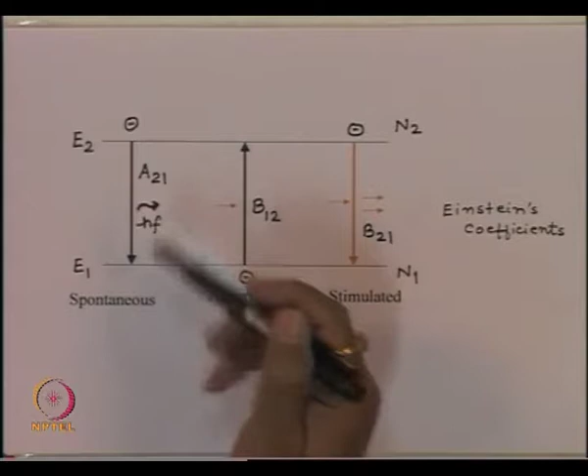In the last lecture, we saw that inside a material there are three processes which take place, namely the spontaneous process, the stimulated process and the absorption process. And then we saw that the spontaneous process takes place on its own. So, if the electron is there in the higher energy state, then naturally it has a tendency to relax to the lower energy state, and in that process the photon is released, which we call as the spontaneous photon.

Then the two processes which take place in the presence of a photon, that is the absorption process, that is when the photon is incident on the material, the photon is lost, an electron makes an upward transition. In the other case, this photon may stimulate a downward transition of the electron, and in that process we have two photons which are emitted, and these two photons have same properties as the original photons, or in other words these two are the coherent photons.

And then we saw that this process is more like a multiplicative process, because one photon can create two photons and then two photons can create further photons and so on. So, once this process starts taking place, the spontaneous emission does not have much scope to show up, and that is the reason in the following discussion we essentially concentrated only on two processes. One is the absorption process and other one is the stimulated process. And then we quantitatively wrote the equation of the growth of the photon flux as a function of time.

We also saw that inside a material the probability of an upward transition and downward transition in the presence of a photon is equal. That means, when the photon is incident, we cannot predict whether this photon will get lost, an electron will make an upward transition, or will the photon stimulate this process and ask this process to emit one more photon.

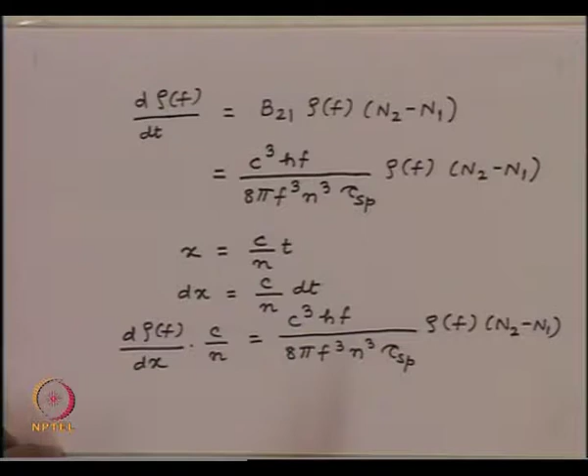And then we saw that when the photon is there inside the material, it is not stationary, it moves with velocity of light. So, therefore, we have a distance travelled by the photon, which is velocity of light inside the material, which has a refractive index n, multiplied by t. So, we could convert this equation, which is with respect to time, in terms of distance x. So, the equation was converted into this equation, which was further simplified to get an equation which was this.

So, we had a differential equation for the photon flux as a function of distance, which could be written as some constant g multiplied by the photon flux. So, this says that the photon flux grows exponentially or decays exponentially depending upon sign of this g when it travels inside the material.

And then we saw three conditions, that is, if N2 is less than N1, then this g is negative, then the photon flux essentially exponentially dies down as it travels inside the material, and this quantity then one can call as the attenuation constant. So, g will be negative. So, g is equal to minus alpha.

Whereas, if you are having N2 is equal to N1, then for the photon flux which is incident on the material, essentially the same number of photons come out. Not that internally nothing has happened to these photons; again some photons got absorbed, some photons got emitted and so on, but the net photon flux which is coming out is the same as the net photon flux which was impinging on the material. This condition we call the transparency condition. So, in that process the G is 0. The photon flux neither grows nor decays when it travels inside the material.

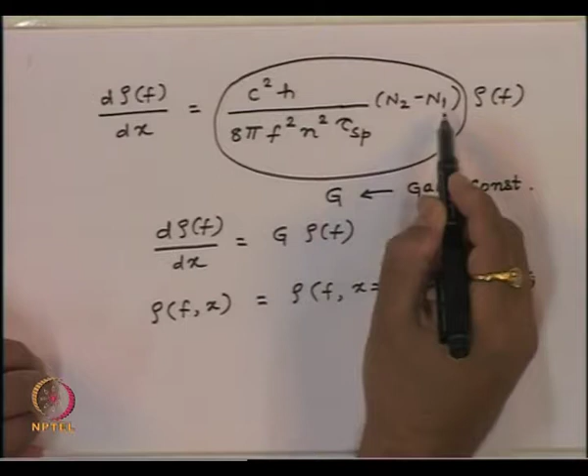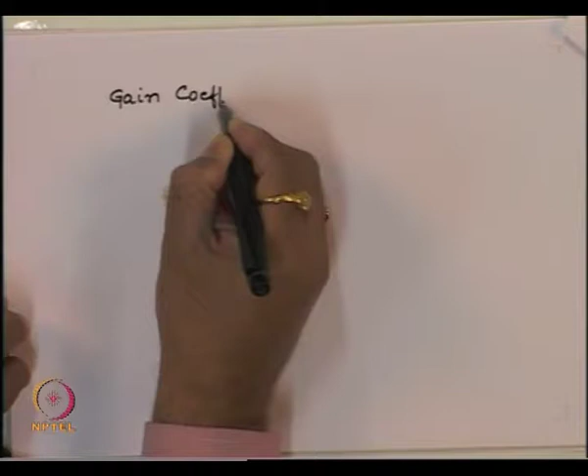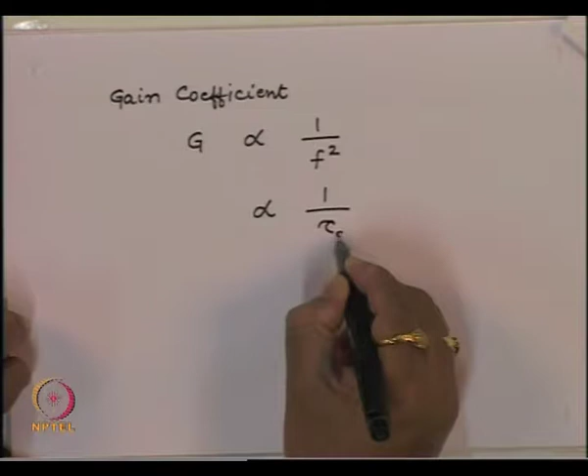So, if you want to write explicitly this quantity, the gain coefficient G is proportional to 1 upon f square. This quantity is also proportional to 1 upon tau sp, it is proportional to the population inversion, which is N2 minus N1, and it is proportional to 1 over the refractive index square. Since the refractive index square is nothing but the dielectric constant of the medium, the gain is inversely proportional to the dielectric constant of the medium.

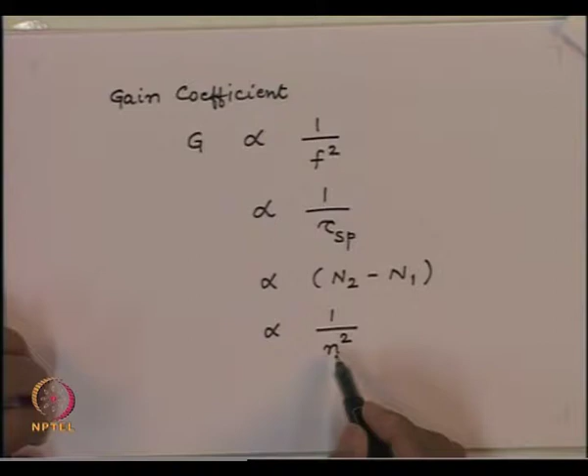But if I look at these parameters here, what we find is for given parameters like population inversion and spontaneous lifetime and so on, the gain is inversely proportional to the square of the frequency. That means lower the frequency, higher will be the gain. In other words, a system can be lased very easily at low frequencies compared to high frequencies. That is the reason creating a laser at low frequencies or longer wavelengths is relatively easier than making lasers operate at high frequencies or shorter wavelengths.

Later on we will see that when you have materials with various energy levels, and if the population inversion is created, then longer wavelengths will have a tendency to lase faster, and once they start lasing, the population inversion which is created gets diverted to the amplification of the longer wavelength signals.

The second thing to be noted here is that the gain is also inversely proportional to the spontaneous lifetime. That means shorter the spontaneous lifetime, higher will be the gain. What that physically means is that if tau sp is small, the electrons are naturally willing to jump down. Even if the stimulated process was not there, it would have jumped down because of the spontaneous process, because tau sp is very small. So, the electron is eager to make a downward transition, which makes the stimulated process easier. So, you get a higher gain.

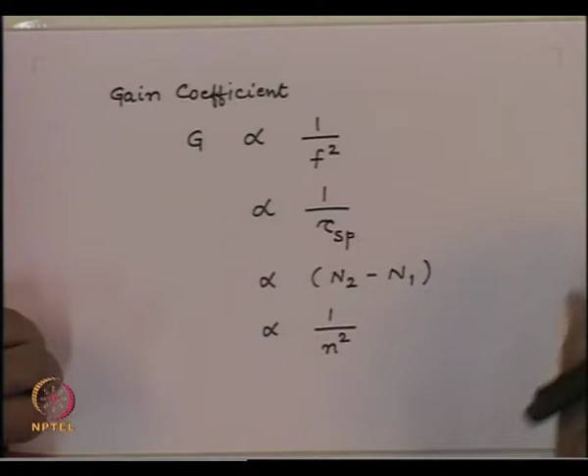Then of course, we have the gain proportional to the population inversion, and it depends upon the dielectric constant also. So, at this stage one can say that if there is a population inversion, then depending upon the frequency and the spontaneous lifetime, the photon flux growth will change inside the material and the radiation will grow exponentially as it travels inside the material.

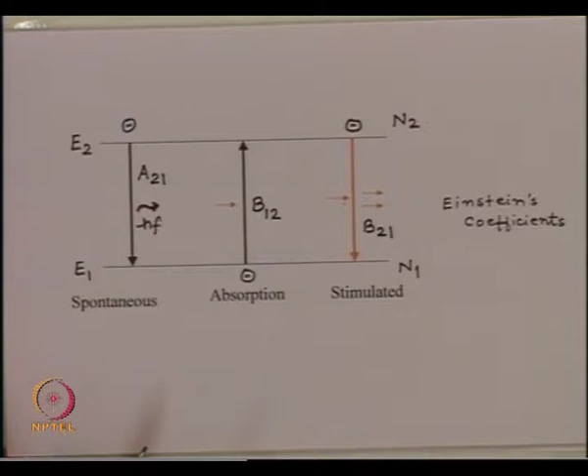So, up till now essentially we were seeing this whole process, the stimulated process, as the amplification process, and in fact this process is an amplification process. If you recall, when we started discussing this process, we said this photon which comes here triggers this transition down. This whole process is stimulated by this photon which is incident here. If this photon is not there, then of course this process will not get stimulated, and there is no question of these two photons getting generated. There is no question of stimulated emission.

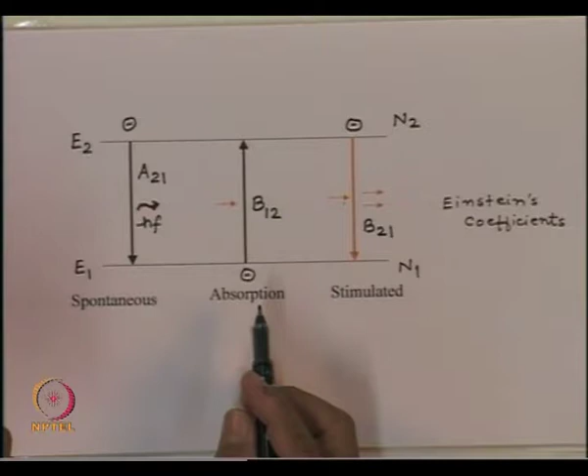So, when we are trying to use this system as an amplifier, that is what principally laser is. It is light amplification by stimulated emission of radiation. Then this photon is supplied externally; that is the photon which is to be amplified. That is the optical signal which is to be amplified.

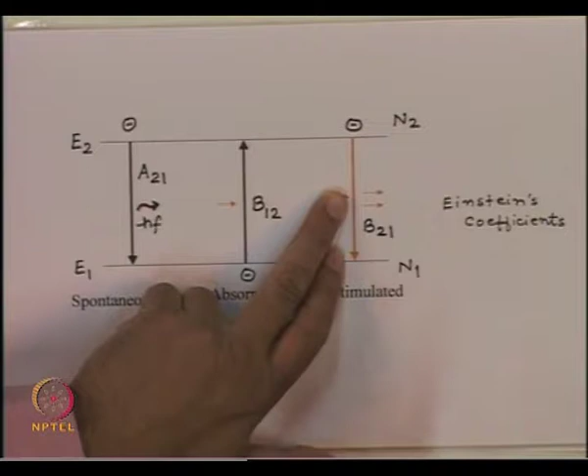But when we are discussing now this source laser, we want this laser to generate light. For optical communication, of course, we may use laser for amplification, but at this point of time we are looking for an optical source. So, what that means is that now this photon which is going to trigger this process is not going to come from outside. If the photon does not come from outside, then of course this process cannot take place.

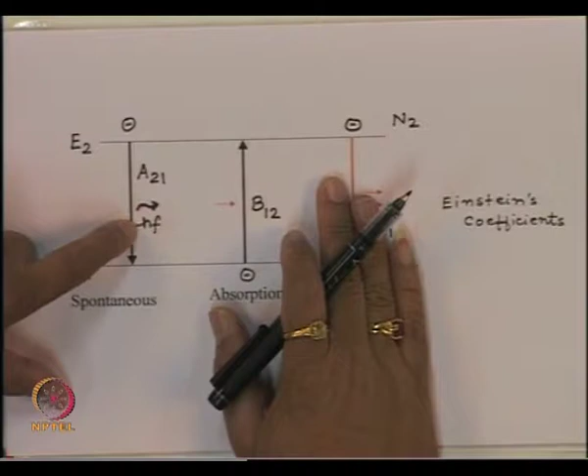But note that if the photon was not present here, and if you create population inversion, that means more electrons in the upper level, then naturally this will make a transition and this photon will be emitted. Once this photon is emitted, the photon is available, and it can trigger a stimulated process. So, even if one transition takes place here, the photon is going to be emitted, and this photon is capable of starting the stimulated process.

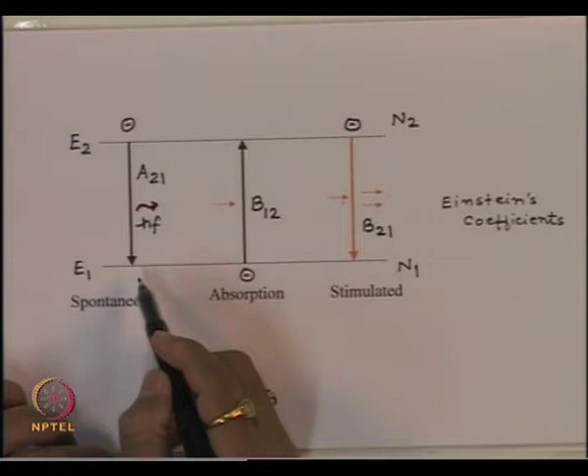But what that means is that the seed for the stimulated emission is internally generated due to spontaneous emission. And since this process is only an amplification process, the characteristics of this photon created by spontaneous emission are going to be reflected into these photons also, because this process is essentially creating more photons having the same characteristics as the original photon.

Now, this photon, because of this transition here, is incoherent radiation, because photons from spontaneous emission do not have a relation with respect to each other. So, they do not travel in the same direction. There is no spatial coherency between these photons. So, if these photons were not spatially coherent, even the photons emitted here will not be spatially coherent. So, if the seed has to come from inside, then the emission you get, even because of the stimulated process, will not have spatial coherency.

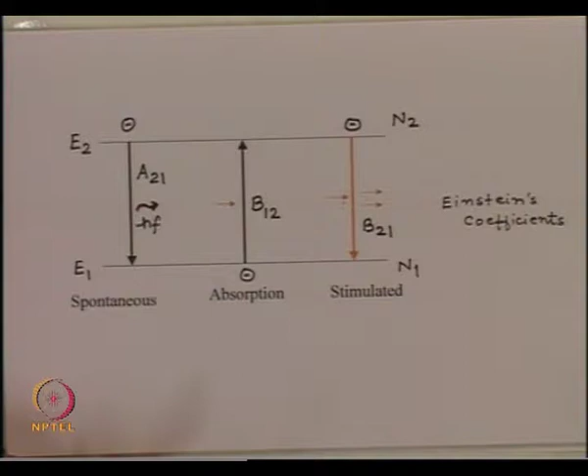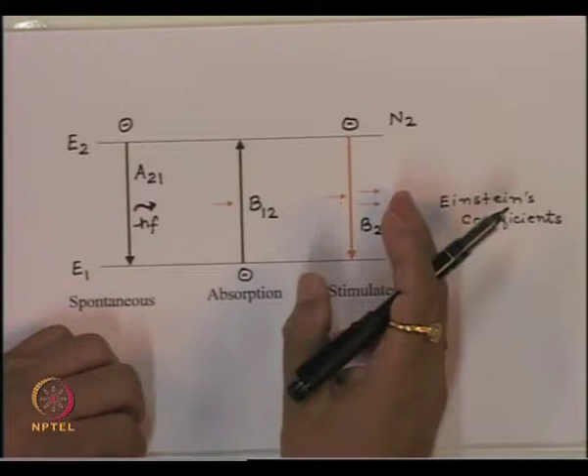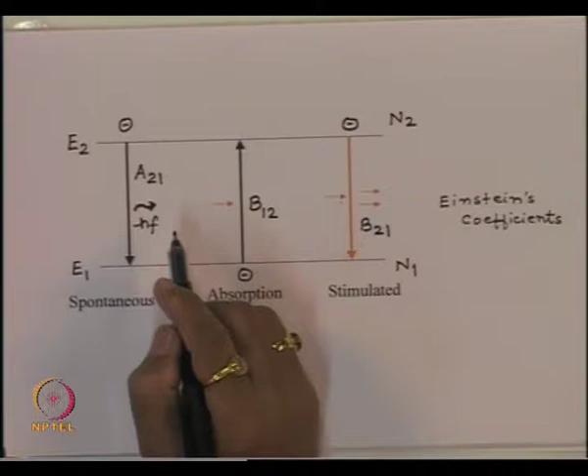Temporal coherency will be there because we are talking about very sharp discrete energy levels. Later on you will see that in a semiconducting material these bands are not sharp, and then this photon will also have a spectral width, and we will not have even temporal coherency in the stimulated emission. So, the first thing we note is that since the seed is coming from inside, though amplification is there and the number of photons is large, they will not have complete coherency.

But we had the same problem in other amplifiers also. With electrical amplifiers, we can always convert an amplifier into an energy source called an oscillator, and there also the signal is generated internally because of noise. Then if you want to create coherency in the electrical signal, which means creating a sinusoidal signal from an oscillator, what do we do? We essentially take that output signal and have a frequency selective feedback.

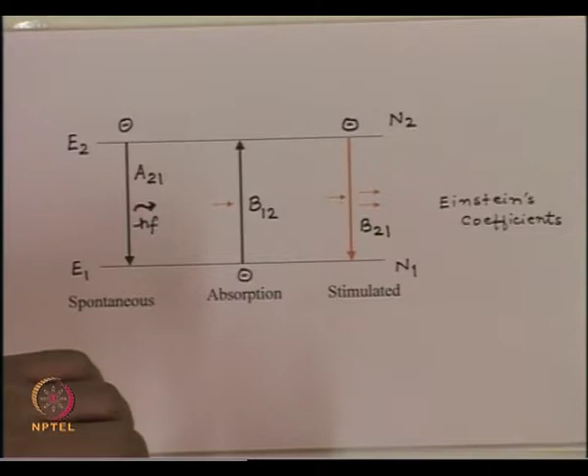So, the photons which are generated, which are random, spontaneous in this case, will give you amplification. And now, if we make sure that not all the photons get amplified, but photons are very selectively fed back into the system, so the gain is selective for certain frequencies, then essentially the coherency in the system is increased. So, the first thing we have to do is create some kind of frequency selective mechanism, so that the coherency of this radiation can be increased in the system.

Now, coming to the semiconducting material lasers, if I look at this expression here, which is the gain coefficient, leave all these parameters here: the spontaneous lifetime, which will become the radiative recombination lifetime here. This is the frequency, which will depend upon the band gap of the material. But the quantity here, which is N2 minus N1, is nothing but the injected carriers in the PN junction under the forward bias condition.

So, if you inject the electrons and holes inside the junction, then this quantity N2 minus N1 equivalently means that I have electrons and holes available for recombination, and these can recombine. Once the photons are generated because of this spontaneous recombination, these photons can trigger the stimulated process, and much faster recombination will take place, which will give the stimulated emission.

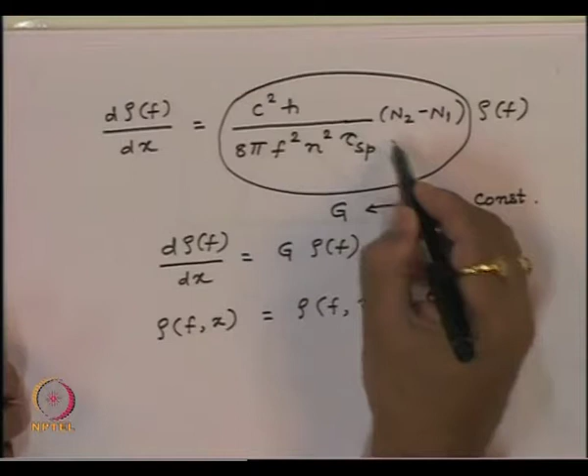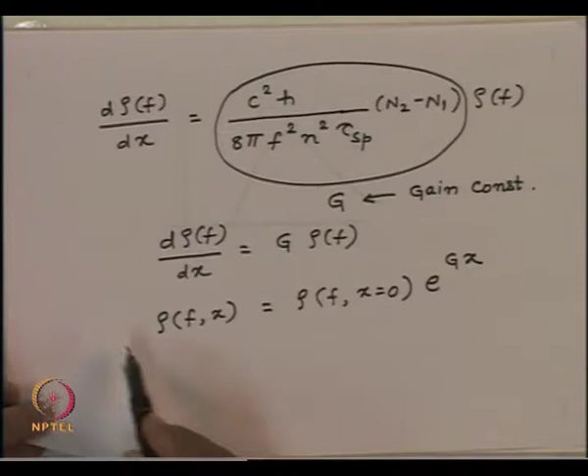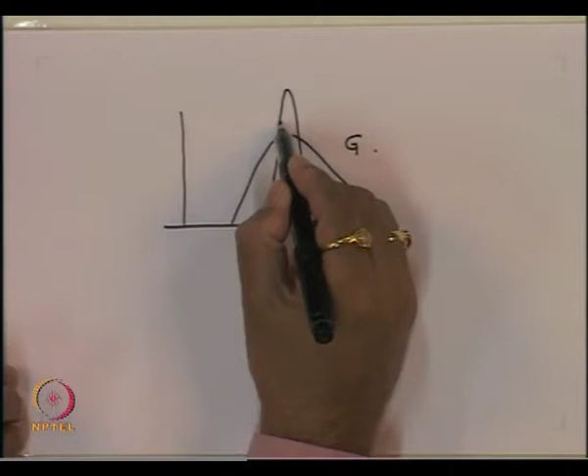But since this quantity g is now riding on the exponent, if I write down the spectrum of the photon flux as a function of frequency, that will be much sharper compared to this, because this is not the spectral distribution of the photon flux. Photon flux has a spectral distribution which is e to the power g. So, we get a photon flux distribution which is much narrower, or in other words, its spectral width is much smaller.

The first thing we had noted for the LED is that it has a very large spectral width, which is not very good for optical communication because it gives large dispersion. We now see that if we take the same semiconducting material and trigger the stimulated process inside it, the spectral width of the photon flux will reduce considerably, because this function is now going to ride on an exponent.

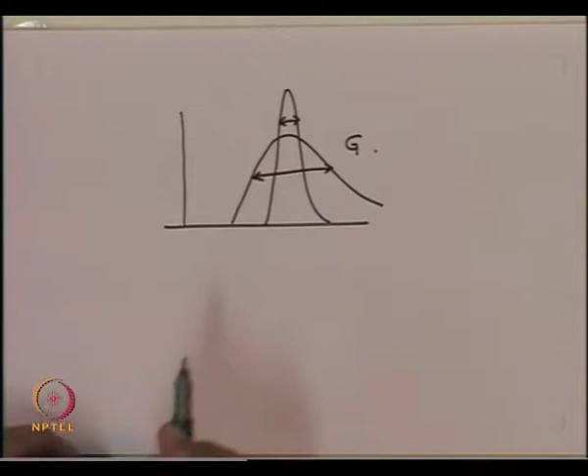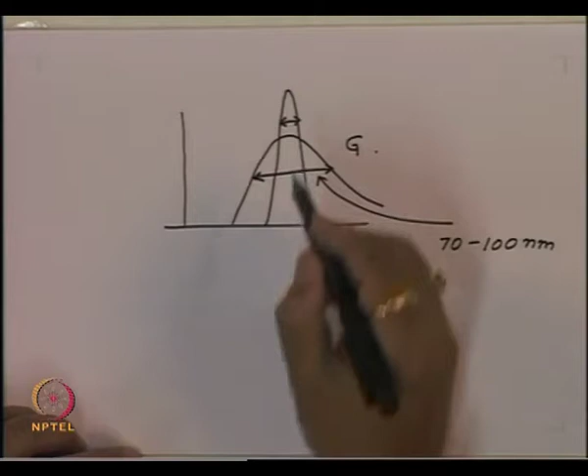As we have seen, the spectral width for the LED was typically of the order of about 70 to 100 nanometers, whereas for a laser the spectral width will typically be of the order of about 1 to 2 nanometers.

So, the idea is very simple: we take the same p-n junction and inject the carriers inside it, and when recombination takes place, the photons generated by spontaneous recombination will trigger the stimulated process. If the stimulated process dominates over the absorption process, we will have stimulated emission coming out. But the spectral width of this stimulated emission will be much narrower compared to that of the spontaneous emission.

So, one reason for which we wanted to go for lasers was the reduction in the spectral width, and that has been achieved here. With the same p-n junction LED, if we do some manufacturing tricks and inject enough current inside the p-n junction, we can get an emission with a spectral width much smaller than what it would otherwise have given. So, one purpose has been achieved in this process.

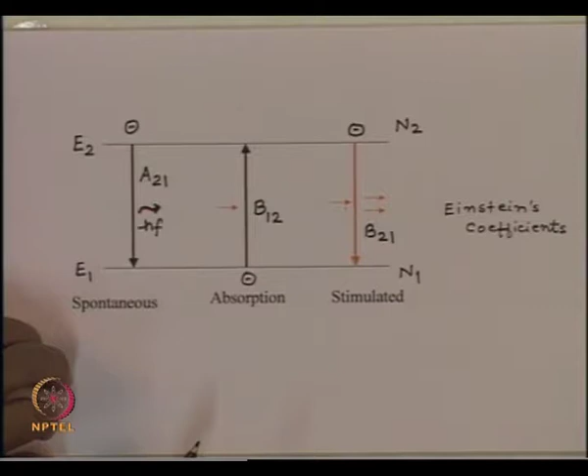As I mentioned, if the whole process is started by spontaneous emission, and the spontaneous emission is isotropic in nature, then the radiation coming out, even for stimulated emission, will intrinsically be isotropic in nature. There is no spatial coherency in that. So, how do we introduce spatial coherency? As I said, spatial coherency can be introduced by giving certain feedback.

So, putting the photons back inside the system only for certain directions and making the photons leave which are not traveling in that direction. If you could do that, then essentially we have created the spatial coherency into the system. So, this is what precisely is done here.

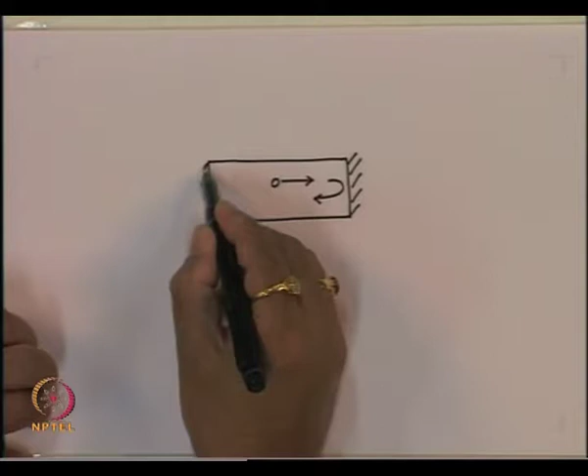Now, when the photon reaches this wall, let us say we put a mirror on the face of this medium. So, the photon will reach up to this point and will get reflected from this. The photon will travel all the way back up to this face, and when it comes here, let us say if you had a mirror here also, the photon will come, will get reflected again and travel back inside this.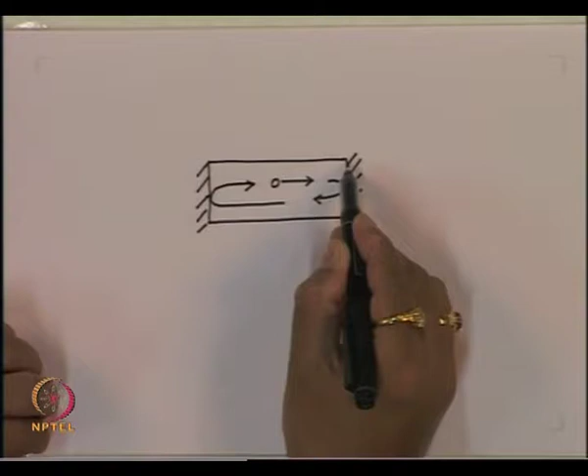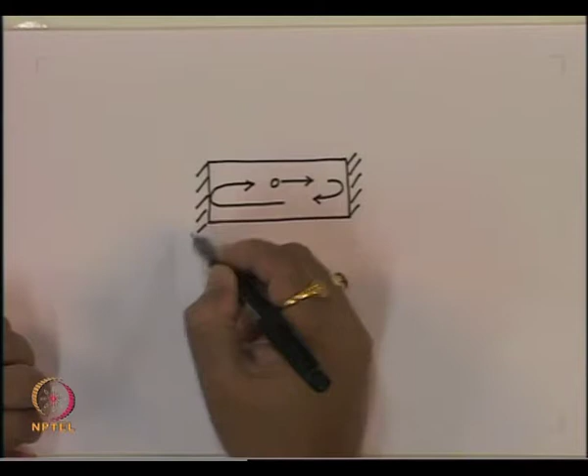So, the photon which has traveled perpendicular to these mirrors, and if these two mirrors are parallel, then the photons which are moving in this direction will come back to this location here. Whereas, if the photon is not moving perpendicular to these two planes, it will move and it will simply get lost. So, those photons which are moving in this direction, they will get lost, they will not be confined inside the medium. Whereas, the photon which is moving perpendicular to these mirrors, it will be confined inside the medium.

And as we saw, if the photon is confined to the medium, it travels more distance inside the medium, and therefore, it grows in number. So, these photons which are moving in this direction, they will travel a short distance inside the medium. So, they will get amplified during this process, but after that they will leave the medium and they will be lost. Whereas, the photon which is moving in this direction will travel this distance, which is much longer compared to these photons, and therefore, will grow in numbers substantially. So, what we have done in this process, we have essentially diverted the amplification process to only the photons which are moving perpendicular to these planes.

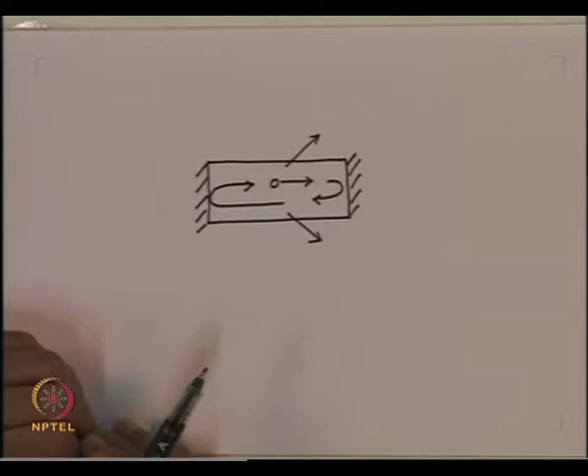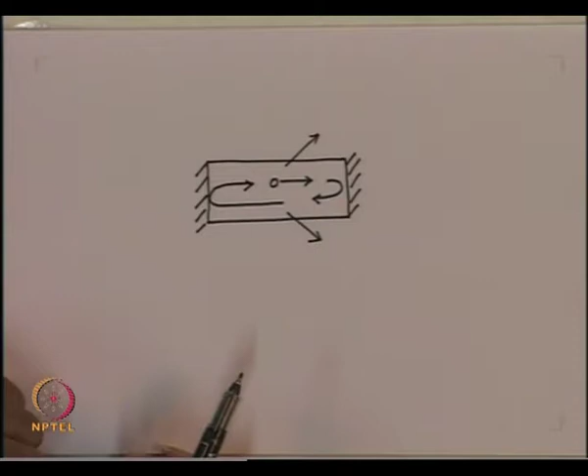So, let us say in the general case these mirrors are not completely opaque, they are not reflecting the complete number of photons, because if that happens, the photons are completely confined inside this box and no stimulated emission will come out of the system, which is not of any use. So, we want that a small fraction of photons should leak out, and those photons which are leaking out will have the same characteristics as the photons which are confined inside this region.

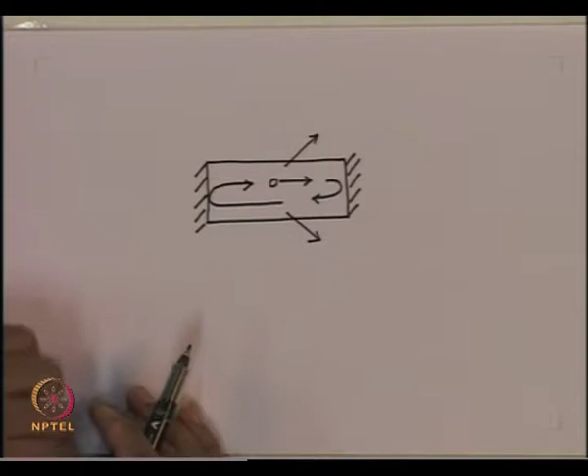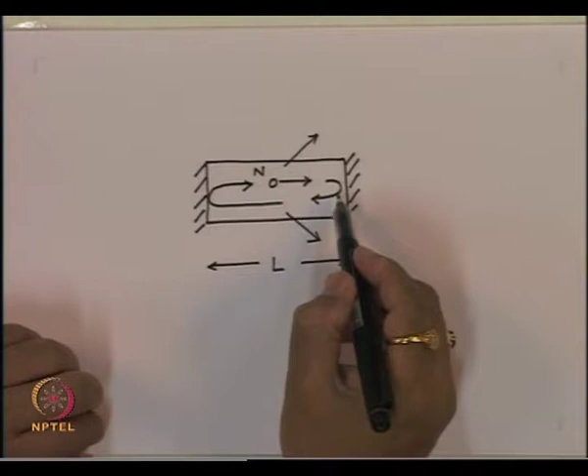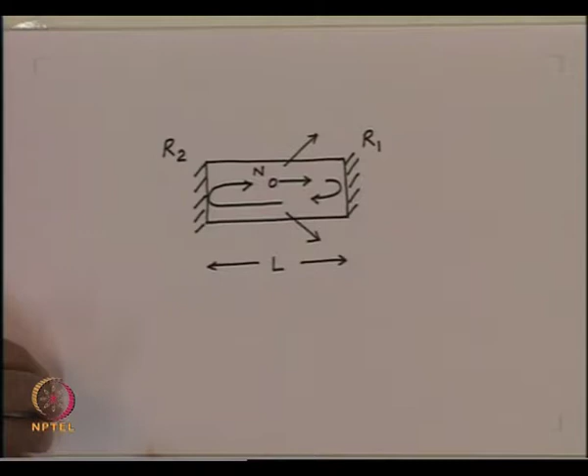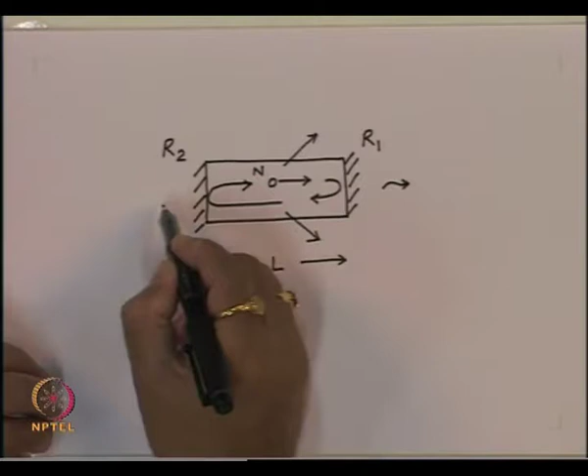So, let us say if we start some n number of photons from this location, they move in this direction, let us say they travel a distance L, and then they again come back to the same location. So, in that process they have traveled a distance which is equal to 2L. Also, if the reflectivity of this mirror is given by R1 and the reflectivity of this mirror is given by R2, then the n photons which started from this location would grow exponentially, which is n times e to the power g into total length traveled, which is equal to 2L. But part of the photons are going to leak also from here and from here. So, the photons which are going to be confined here will be multiplied by this reflection coefficient, which is R1, similarly reflection coefficient here R2.

Also, it is possible when the photons are moving inside this, there may be some other mechanism by which the photon may get lost, because of recombination or because of absorption. So, we have a stimulated process which gives you gain, but there may be some other processes which might create a loss for the photon. So, we have a gain inside this system, let us say this is G, and we are having an attenuation constant for this material, which is, let us say, given by alpha. So, when the photons move inside this, we will have the net gain coefficient, which will be G minus alpha.

So, now one can say that if we start with n photons from here, after one round trip, the photons which reach here will be n e to the power G minus alpha into the distance travelled, which is 2L, multiplied by the reflection coefficients, which are R1 and R2.

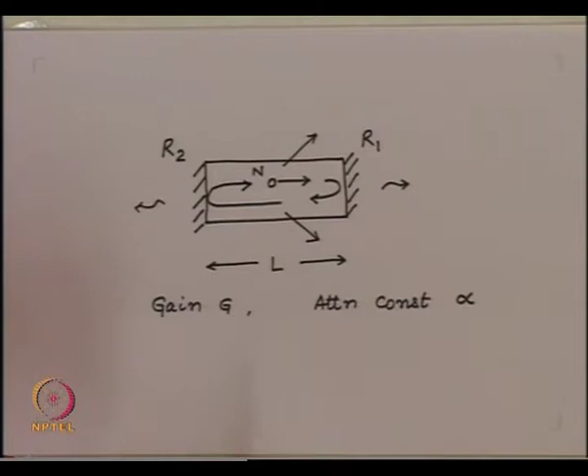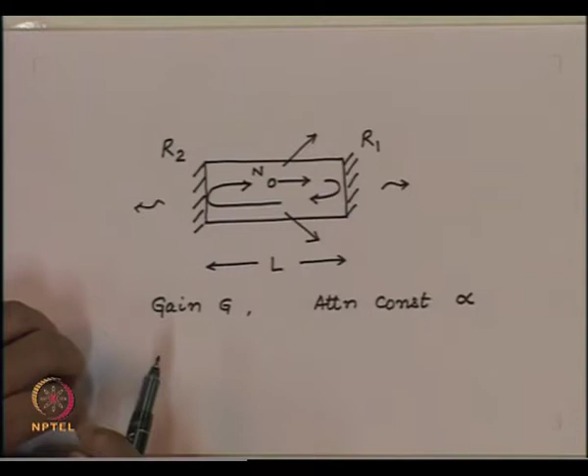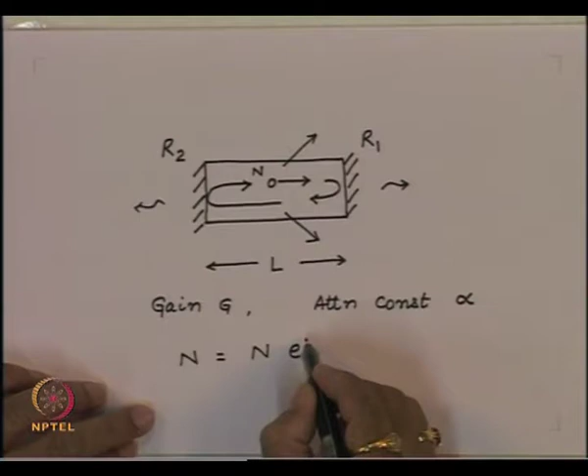Now, if we want the whole system to be in a steady state condition, that means even after leaking these photons out, the total number of photons which are confined inside this region is unchanged as a function of time, then the number of photons which started from here should remain the same after one round trip. Or in other words, n should be equal to n e to the power G minus alpha into 2L multiplied by the reflection coefficients, which is R1 R2.

N will cancel. So, essentially we get R1 R2 e to the power (G minus alpha) into 2L is equal to 1. This is then the condition for the sustained oscillations inside this region, which is the same as the Barkhausen condition for an electronic oscillator. So, if this condition is satisfied, then the photon flux neither grows nor dies as a function of time inside this region.

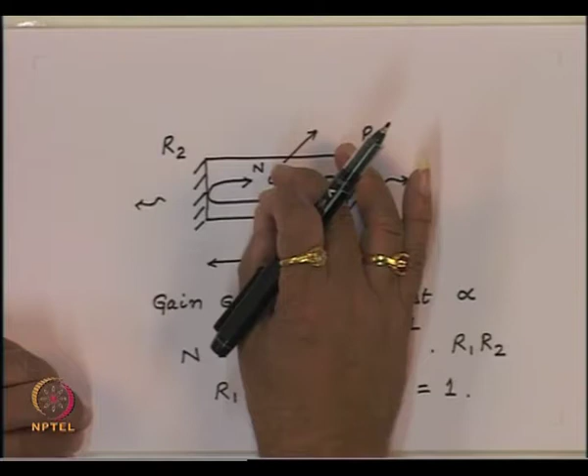So, considering all losses inside this medium and also the partial reflections which are going to take place from the mirrors, if this condition is satisfied, then you will have the net flux of the photons constant inside the region, and also the net photons which are leaking out will be constant. So, we will have a constant radiation coming out of this system, which will have the same properties as the photons which are inside this, and inside this region the photons are coherent. So, this radiation which is coming from here also will be coherent.

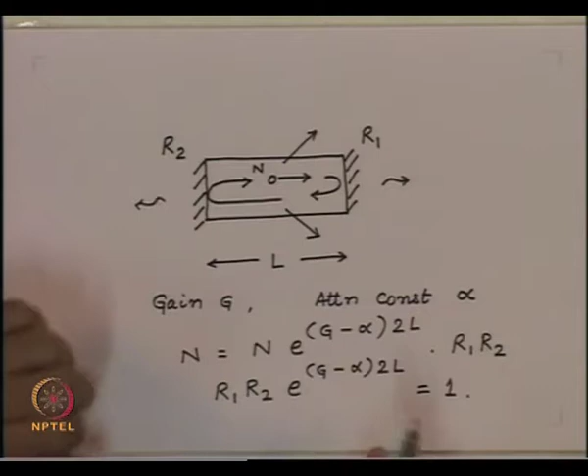So, intrinsically we had temporal coherency because the spectral width was very small, it corresponded to the energy levels, but originally it did not have spatial coherency. And now by putting these mirrors here, we have introduced the spatial coherency, because now only the photons which are moving in these directions get amplified, but the photons which go in this direction do not get significantly amplified. So, this emission which is coming out from here will be spatially coherent also.

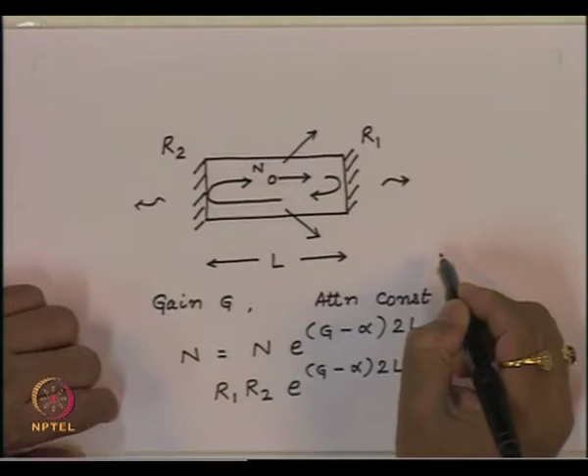Or in other words, the radiation which comes from here will be highly beamed radiation. So, it will be a narrow beam, because this radiation corresponds to essentially the photons which are bouncing back and forth between these two mirrors. So, this is the very important condition for the sustained oscillation inside this region.

Now, up till now we were treating the photon more like a particle, and we talked only about the number of photons and so on, but a photon essentially is an electromagnetic wave. So, when we are saying the photon is moving from here and then coming back like this, essentially the electromagnetic wave is bouncing back and forth between these mirrors. So, if the electromagnetic wave travels a distance which is equal to 2L, it undergoes a phase change.

So, after one round trip, even if the total number of photons is conserved, that means this condition is satisfied, if the phase of the photon after one round trip is not a multiple of 2 pi, then the photon which is reaching here after one round trip will not be in phase with the photon which is born there at that instant of time. So, these two fields will cancel each other. In other words, it will have a destructive interference.

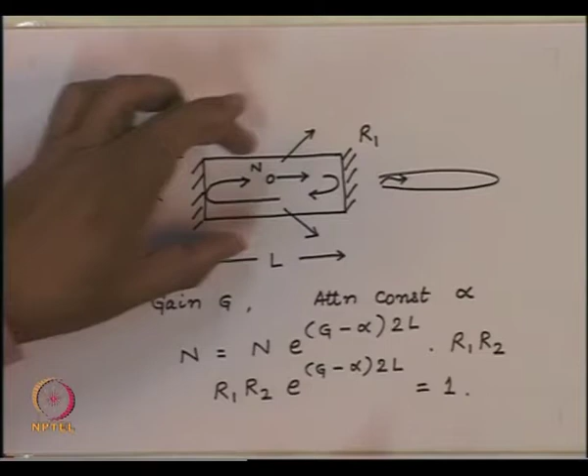So, for a sustained oscillation, only this condition is not adequate. This condition should be there, but in addition to that, we must also satisfy the phase condition for this wave which is traveling inside this. Now, note here, this is a bound structure. You have a bound medium here and the wave is traveling inside this. So, essentially we are talking about propagation of an electromagnetic wave inside a bound dielectric medium, which is nothing but a waveguide.

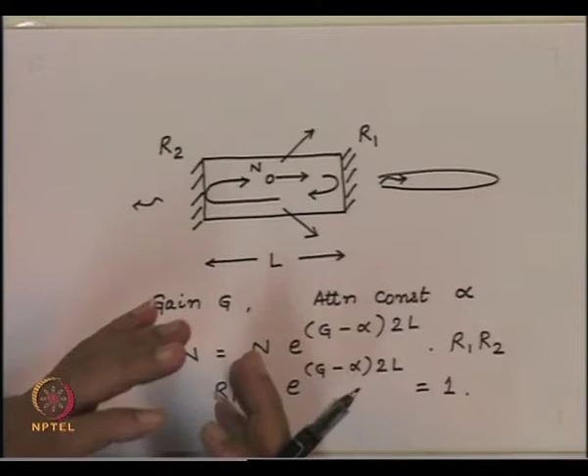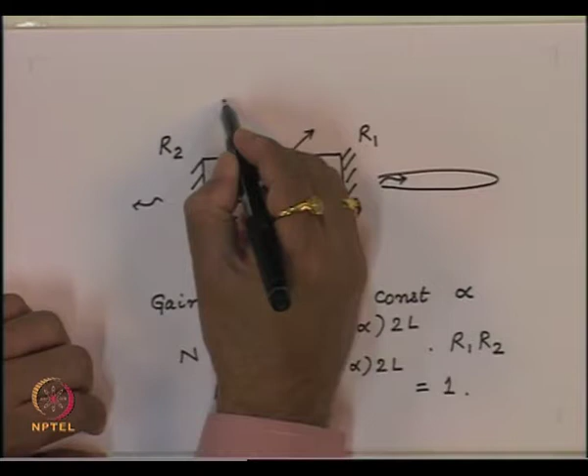So, we have here propagation of light inside this medium, and this structure is like a waveguiding structure. And since we are putting reflecting boundaries on the two ends, the electromagnetic wave is reflected and bounces back and forth, or in other words, this structure has become a resonant cavity for the electromagnetic wave. And therefore, this is what is called the Fabry-Perot cavity. So, this structure where photons are confined by putting mirrors on two sides is what is called the Fabry-Perot cavity.

So, now we have a waveguiding structure like this, and the electromagnetic wave is going to move inside this, and then you are going to put the boundary conditions here in the form of mirrors which will reflect the wave. So, you will have a resonance inside the structure.

Now, we know from our basic knowledge of waveguides that when an electromagnetic wave travels inside this bound medium, it may not travel like a uniform plane wave. It travels in the form of a mode. So, it has certain distributions in the transverse direction, which is this direction, and will have a propagation constant in this direction. And as we know, the propagation constant is characterized by the wavelength of that mode inside this waveguide.

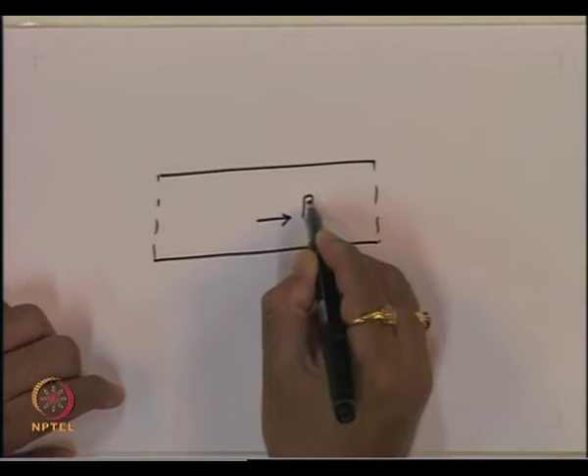So, you can say that you have now the phase constant in this direction, which is given by beta, and beta, which is the phase constant, is equal to 2 pi divided by lambda, which is the wavelength, multiplied by n effective of this medium.

Now, note here we are using the term n effective and not the refractive index of this medium, because when the electromagnetic wave travels inside this, it is going to travel in the form of modes, and the velocity will not be same as a uniform plane wave in that medium. So, if we calculate the ratio of the velocity of light in vacuum to the velocity of light of a mode inside this medium, that number will not be same as the refractive index of the medium, but that number is the one which we call the effective refractive index. So, for a particular mode of this waveguide, we have a refractive index which is given by this.

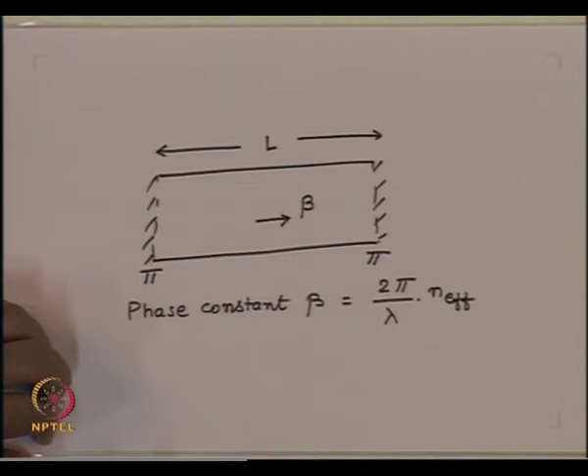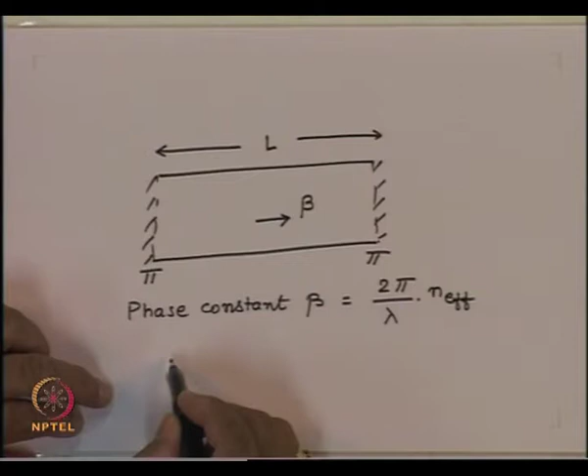So, now what we are saying is, if the length of this thing is L, and let us say you are having completely reflecting mirrors here, which introduce a phase shift of pi. So, we got a phase shift of pi here, a phase shift of pi here, and the wave has travelled a distance which is 2L into beta. So, the net phase change which we get in one round trip will be equal to pi plus pi, which is 2 pi, plus 2 beta into L.

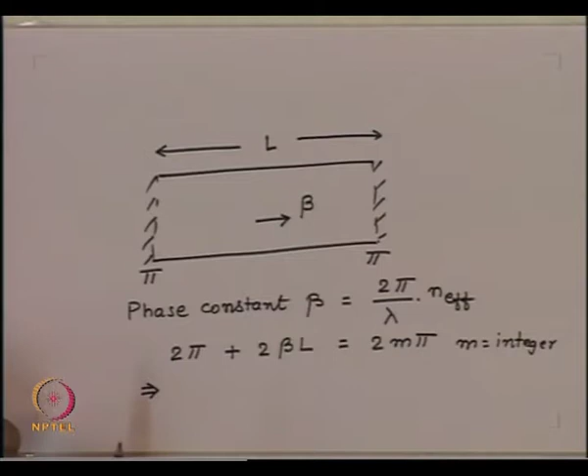And we are saying for constructive interference, this phase change must be equal to multiples of 2 pi. So, you want 2 m pi, where m is an integer. We can absorb this 2 pi on this side. So, what that means essentially is that if this condition, 2 beta L equal to integer multiples of 2 pi, holds, then we will have constructive interference, and then we can have the oscillator working and getting a coherent emission out here.

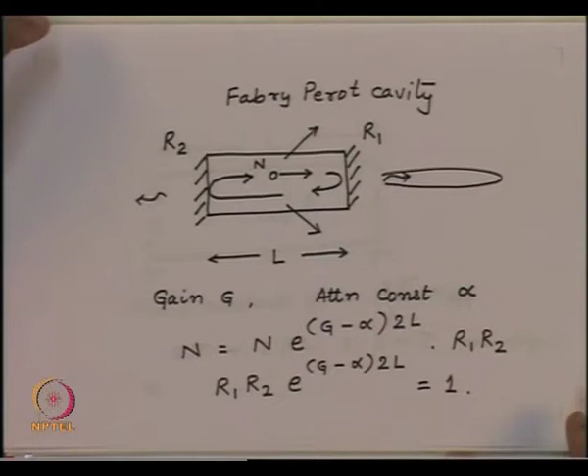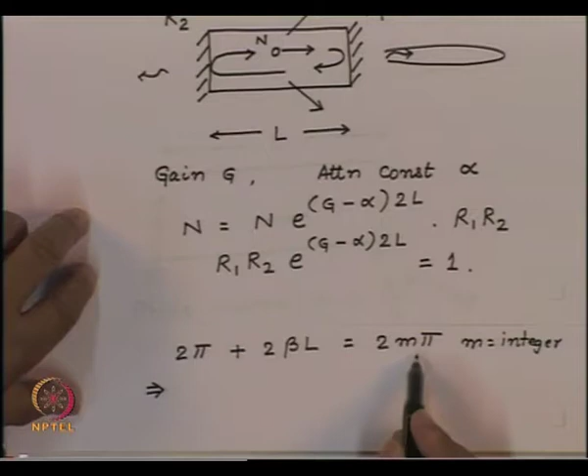So, for a coherent emission to come out or the laser to work, we should have two conditions satisfied. One is this condition, which is R1 R2 e to the power (g minus alpha) into 2L equal to 1, and the second condition, which is the phase condition, says that 2 beta L is equal to multiples of 2 pi. We can substitute now from here.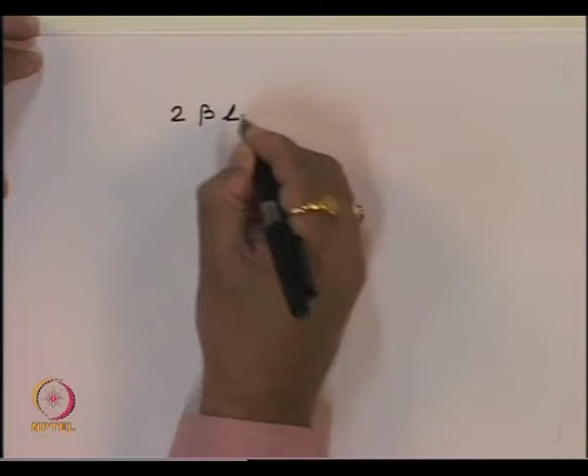So, you want a condition 2 beta L equal to multiples of 2 pi, which is 2 m pi. We can substitute for beta. So, 2 into 2 pi divided by lambda into n effective into L, that is equal to 2 m pi. Two pi will cancel. So, you will get L from here, that is equal to m into lambda upon 2 n effective.

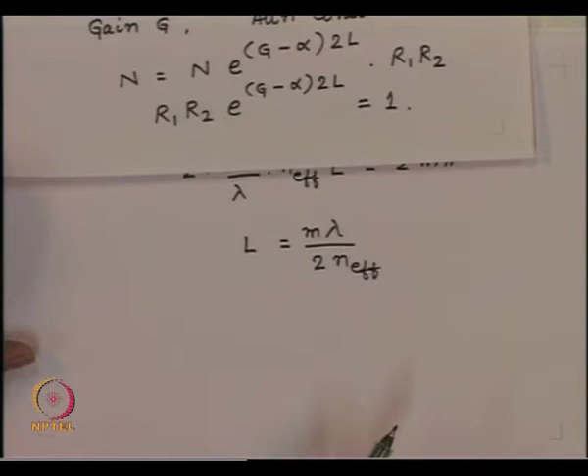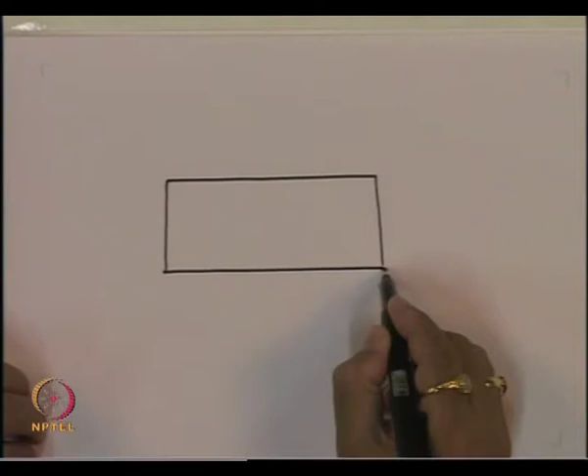So, what that means is that the length of this cavity should be multiples of lambda by 2 divided by the effective index of the material. So, if the length is equal to lambda by 2, essentially we have a standing wave pattern inside this resonator. So, this is the cavity. The field has to be 0 at these two ends, where reflection coefficients we have taken as -1. So, we can have a pattern that looks like that.

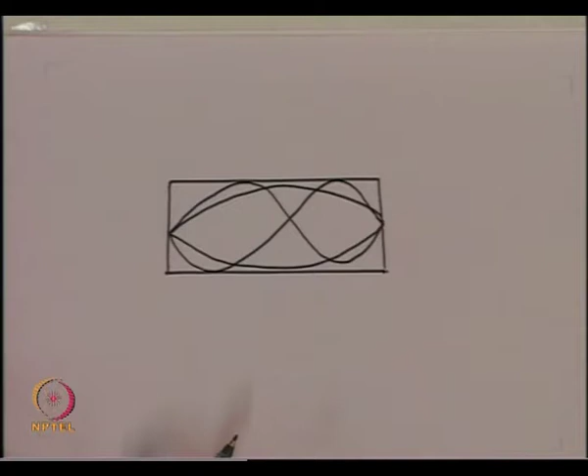If this is equal to lambda by 2, which will be the first resonance, or we can have like this, which will be the second resonance, and so on. So, what that means is, if the material has population inversion and if it has length L, then we can have many values of m which might satisfy this condition. But note here that m is an integer. So, essentially only discrete wavelengths would satisfy this condition.

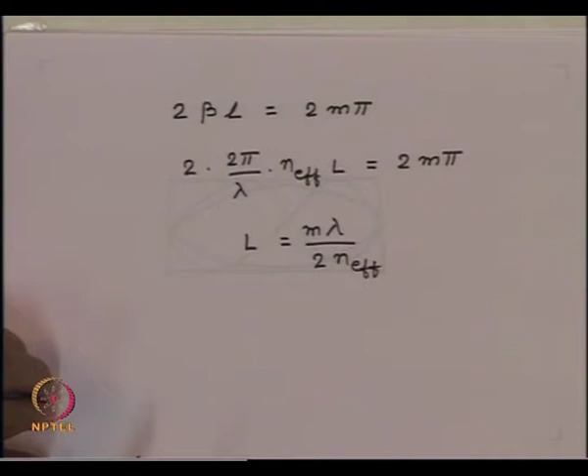So, even if you are having a population inversion which can amplify a broad radiation, every frequency within that band will not satisfy the phase condition.

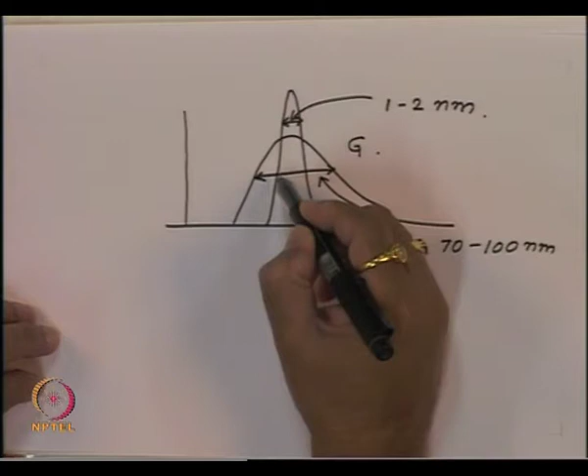As we have seen, the profile which we have got for the emission photon flux looks something like this. What we are saying now is that within this band where the amplification is taking place, not every frequency can satisfy the phase condition. So, by and large, the gain condition will be satisfied by this profile, but the phase condition will be satisfied only at a discrete number of frequencies or wavelengths within the spectrum.

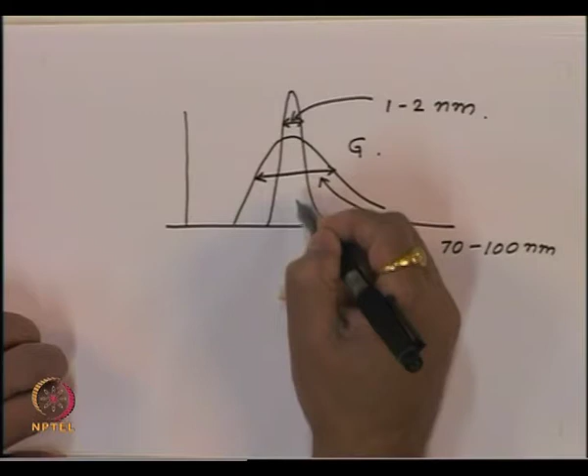So, let me exaggerate this picture a little bit. If we say that the spectrum is like this, which we get because of the population inversion and all other parameters of the material, then within this spectrum only certain frequencies will satisfy the phase condition. So, the spectrum will not be a continuous spectrum for the laser emission. It will essentially be a set of these spectral lines, because these are the lines which will satisfy this phase condition here.

So, two things should be noted here when we talk about emission from the laser. Although we have population inversion over a very large energy range, which, as we saw in the case of the LED, gives a spectral width of about 70 to 100 nanometers, the same population, when it generates stimulated emission, has a much narrower spectral width, because the n2 minus n1 function essentially rides on an exponent, and because of that the effective spectral width of the photon flux is much smaller.

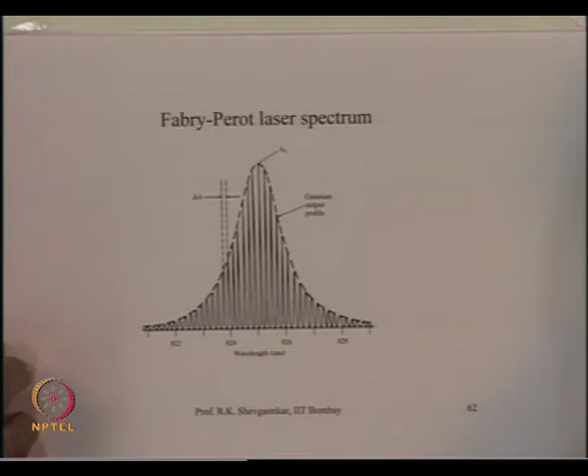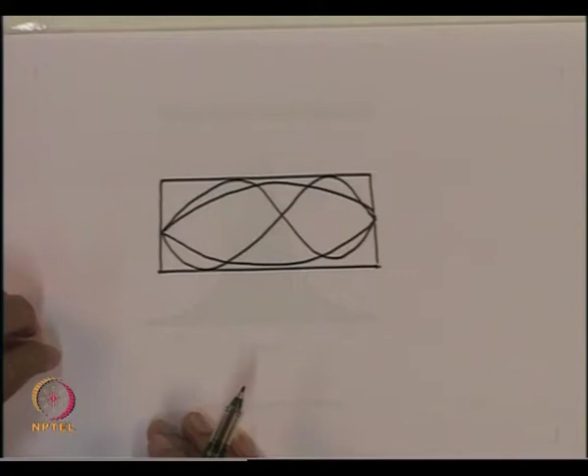So, if you wanted to make a true laser, that means if you wanted to create a single frequency or single wavelength from this laser, one of the ways is to create this cavity in such a way that only one frequency lies in the band where gain is possible, and the other frequencies lie outside this band, so they will not get amplified. In other words, only one fundamental mode can be excited inside this cavity, and if the second mode is not excited, we will get only one spectral line generated by this laser, with a very narrow spectral width.

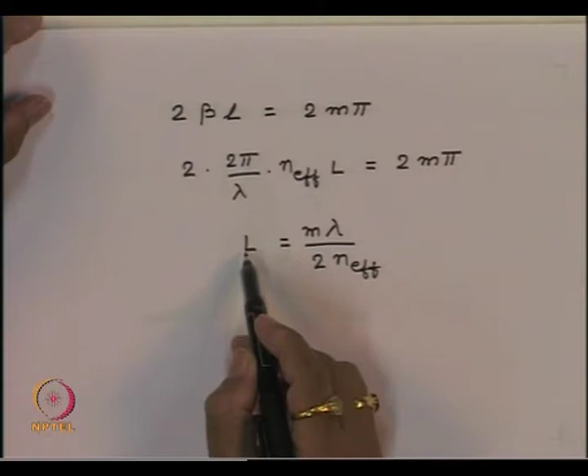But if we do that, the length of this cavity should be such that even m equal to 2 is not possible. In other words, the length of the cavity should be less than lambda of the radiation which we want to amplify. Now, since we are talking about emission typically of the order of about 1 micron wavelength, the length of the cavity must be less than 1 micron.

Now, you will note that the depletion region inside the p-n junction, where the recombination takes place, already has a very small length. If you also make this length very small, about 1 micron, then the total volume over which the stimulated amplification takes place is extremely small. So, this region cannot really sustain a very high photon flux density.

So, in principle, by reducing the size of the Fabry-Perot cavity, one should be able to excite only one line and therefore get a very narrow spectral width of the laser, whereas in practice the length cannot be very small. And if the length is not very small, many more values of m would satisfy this condition, and a typical spectrum from the laser would look like that.

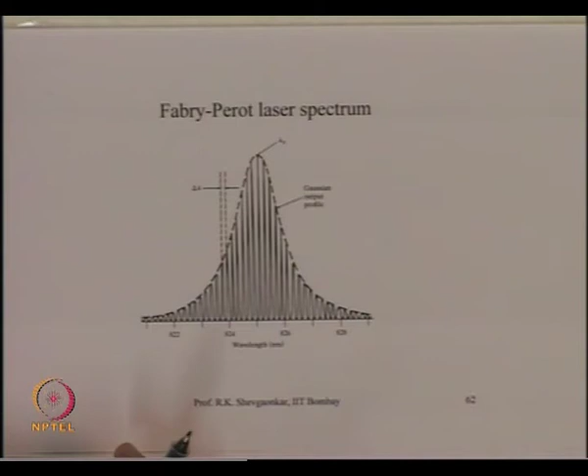So, by doing this, we have got significant improvement in the characteristics of the radiation. We got a very narrow spectral width compared to the LED. Also, as we have seen earlier, we have now created spatial coherence. The photons are going to come out perpendicular to the mirror, in a cone which is very narrow. And if this cone is much smaller than the critical angle cone for the material, most of the photons will come out of the system. In other words, we got a large efficiency for the device.

So, what we conclude from here is that if we take a semiconductor PN junction and make the stimulated process overcome the absorption process, then the stimulated emission will have a very large efficiency. Most of the radiation will come out. This radiation will have a much narrower spectral width compared to what one would get from an LED, and therefore this source will be much superior to the LED for long distance communication.